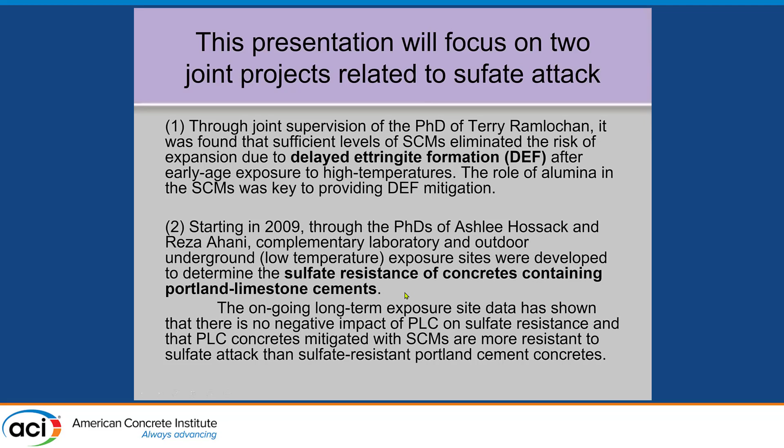And then in 2009, we had 2 separate PhDs, jointly funded by the Cement Association of Canada, to look at the sulfate resistance of these Portland limestone cements because it was a concern. The results have shown that there isn't a concern, and so they're now allowed. That's the quick and dirty study or summary.

So, delayed Ettringite formation. Some products, because this is going back quite a few years now, about 20 years, some cementitious materials or products, concretes, when heat cured typically above 70 Celsius, may undergo deleterious expansion if later exposed to sufficient moisture. And this has been referred to as DEF, due to an abundance of Ettringite found in the damaged concrete.

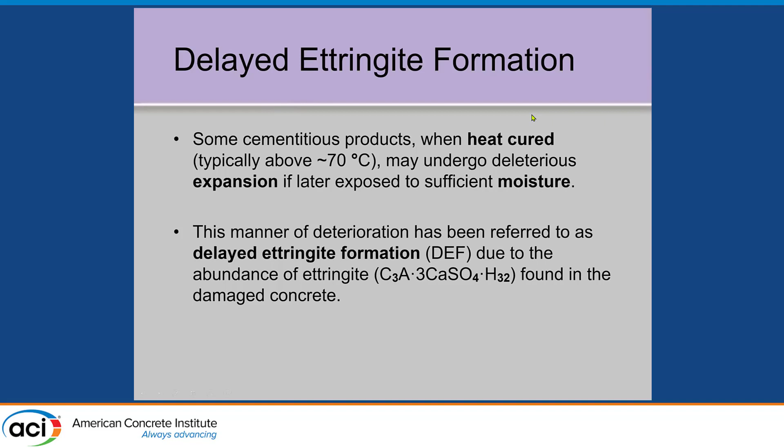And it started with railway ties. First mentioned in the 1970s in Germany, concrete railway ties that were heat-cured precast ties started to crack up and lose their pre-stress. And it was related to the elevated temperatures, maybe curing conditions, cement composition. And then there were other cases of DEF reported in various places, including US, Canada, Finland, South Africa, and Australia. And most of these associated with type 3 or higher strength cements.

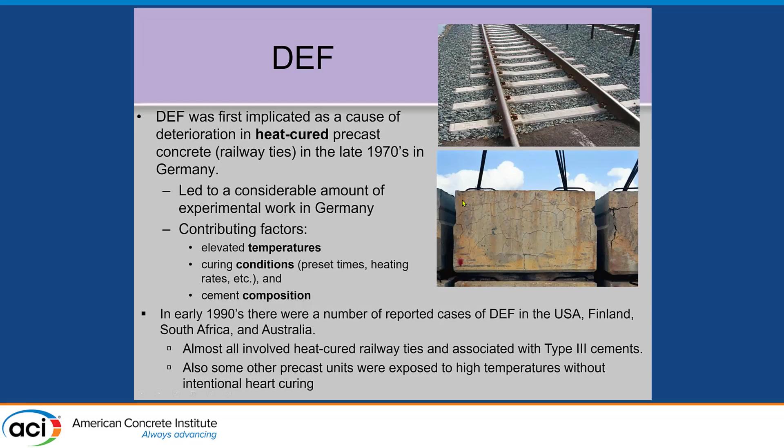And some other precast units that were exposed to high temperatures without intentional heat curing, not hard curing, such as this girder in Texas. There's a precast girder which cracked up before it even went into service. And people said it was ambient temperature DEF, but really it was cast in the hot sun, and I'm sure it got up to about 90 degrees Celsius inside the concrete during the curing. And so type 3 cements that perform quite well at room temperature, and these are expansion graphs versus age going out to about 3 or 4 years here.

At room temperature and up to 60 degrees C, you don't see any expansion. They just keep going without any expanding. The concrete's quite fine. But then when you get to 70 degrees C, in this case, the expansion starts to creep up over time. After about a year, it starts to creep up. And 0.5% expansion is a lot of expansion.

We typically talk about 0.04 expansion as the expansion you need to crack concrete. So these are mortar bars, so 0.1 for mortar bars. And then you see as the temperature goes up, that expansion occurs earlier and gets bigger.

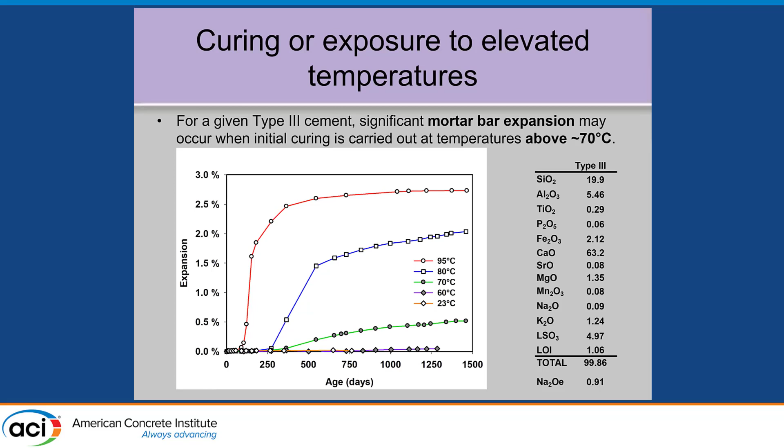So that was the problem: some of these heat curing regimes were going to very high temperatures, intentionally or unintentionally, to accelerate the curing to get the early strength. Typically for precast products, they're trying to get that early strength. So these were just heat cured for several hours at those temperatures and then placed in water, and they expanded over time.

And then we also did some work with concrete. So I didn't get a chance to update this graph, but you see the same story. When these concretes were exposed, type 3 cement concretes, two different ones here, at 80 to 95 degrees, we're getting deleterious expansion over time. But it's happening after about a year.

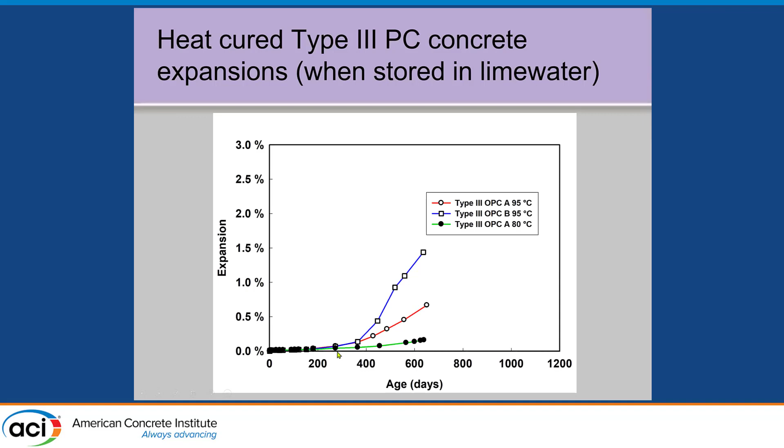But not all cements will expand when you cure them at these high temperatures, and not even all type 3 cements will expand at those temperatures. People were doing research on this at the time and looking at chemical parameters, but chemical composition cannot predict whether they're going to expand or not. Somebody came up with a formula, applied other data to it, and found it didn't fit anymore.

So here's some examples. There's a type 3 that expanded. There's a type 1 high alkali that's expanded. Meanwhile, a type 2 expanded, but not a type 5 or a type 1 low alkali cement. So there are certainly cements that are more susceptible than others.

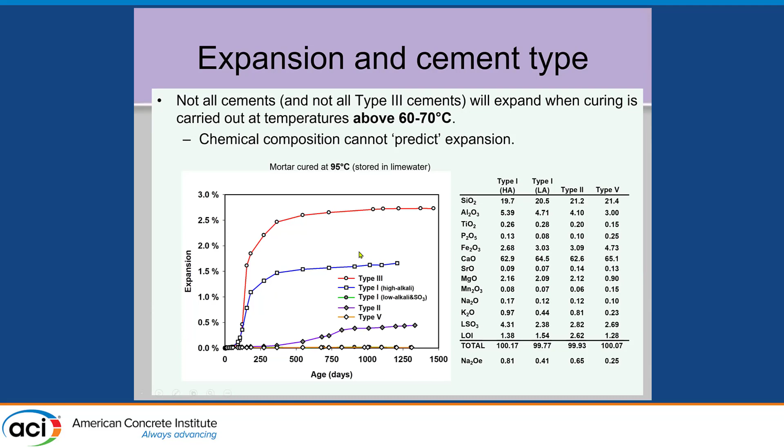Now, when you cure concrete at normal temperatures, this is a type 3 cement, the pore solution analysis over the first 24 hours on a log scale. Typically, you'd see the alkalis in solution, and hydroxyl in solution, and the sulfate in red here would typically form gypsum and ettringite, precipitate gypsum and ettringite, and then the concentration would come down, then the hydroxyl concentration would go up to keep a balance of cations and anions. So that's what normally goes on.

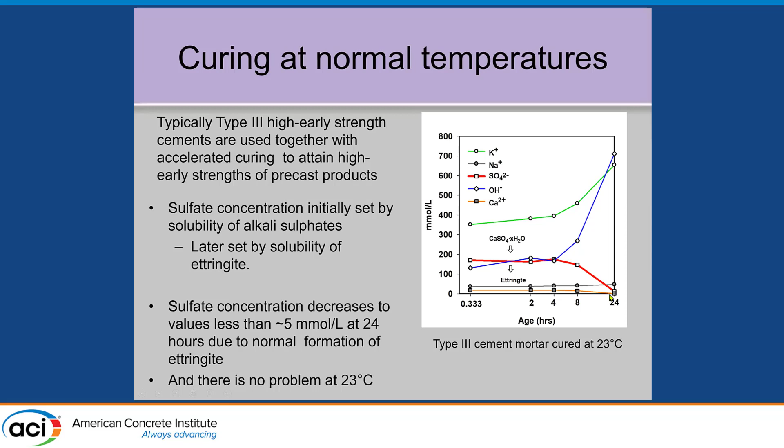Usually by 24 hours, there's no sulfate or no significant sulfate left in solution. At room temperature, that's what happens. So there's no problem there.

However, if you cure at high temperatures, such as 95 degrees C, the same cement, what happens is it looks the same up to about 4 hours when the heat curing was applied. And then what you see is that the sulfate doesn't disappear. It remains constant or slightly enlarged. And because the sulfate's up, the hydroxyl doesn't come up, because they have to balance the negative charges.

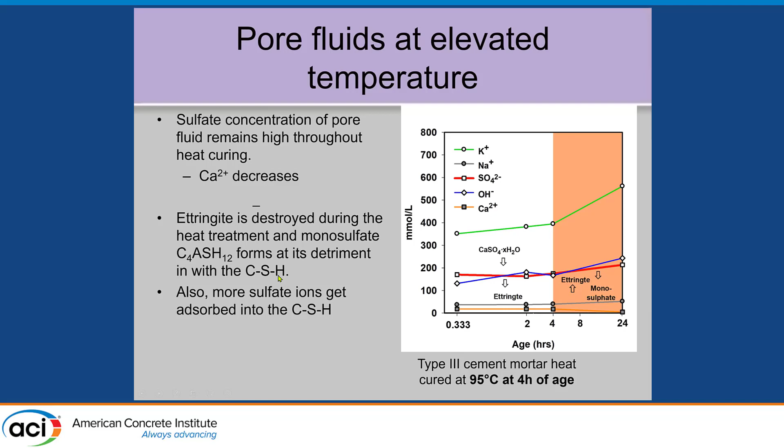So where is that sulfate going? Normally the ettringite is disappearing. Any existing ettringite gets destroyed at these temperatures, and some monosulfate forms and precipitates out. But a lot of the sulfate gets absorbed into the CSH itself, and that becomes part of the story.

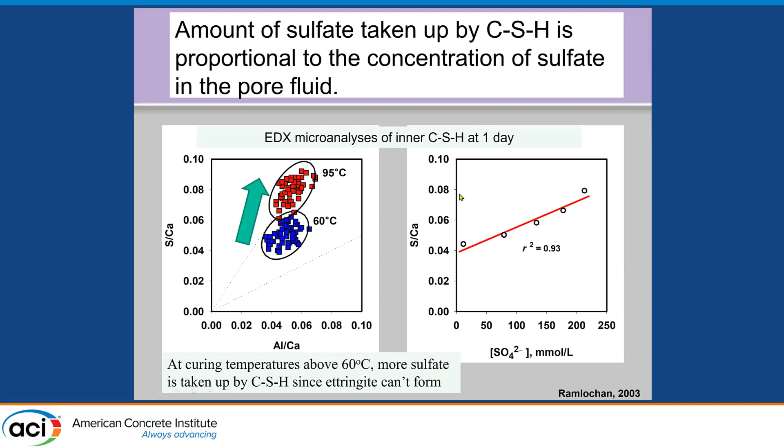And if you look at temperature effects, these ratios of a bunch of EDX points on CSH, what you see here is the sulfur to calcium ratio versus the alumina to calcium ratio. So there's more sulfur in the CSH when it's been cured at these high temperatures, whereas lower sulfur at 60 degrees, which is more representative of what you'd see at the lower temperatures. So there's a big shift in the sulfur that's contained in the CSH itself, and the pore solution increases as well with that higher sulfur in the CSH.

And then what happens afterwards is you put the concrete, or the mortar bar in this case, in water, and you get leaching. So the sulfate starts to come out. It starts at 1 day, you get these high sulfate ratios, and then at 64 days, 96, going down to several years here, the sulfur is coming out of the CSH. So that's what all these dots are, the sulfur levels within the CSH itself.

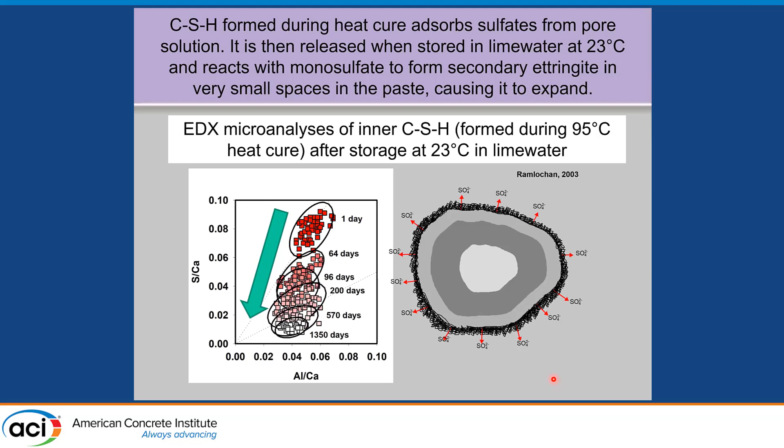So that's the CSH layer on the right-hand side. This would be the CSH layers, and that sulfur is going out of the CSH and coming out into the surrounding matrix. So this is just a schematic: the sulfate was in the CSH, it's then exsolving out through the system and getting removed over time. So the sulfates largely come out because of the alkali leaching.

If alkali leaching is prevented, sulfates tend to remain in the CSH and you don't get any expansion. This is work that Charlotte Famy did. She was working with Karen Scrivener at the time. They were doing her PhD about the same time as Terry did.

You see that in a high potassium hydroxide solution, there's no expansion. But when you reduce the high hydroxyl ion concentration in the pore solution, the expansion started to climb, and in pure water you got the most expansion because it's leaching out the sulfate from the CSH, and it's reacting to form this delayed ettringite.

This somewhat ties up to ASR because often DEF was associated with ASR damage, because ASR also binds up alkalis and takes it out of the pore solution, reducing the pH somewhat, such that you might get expansion.

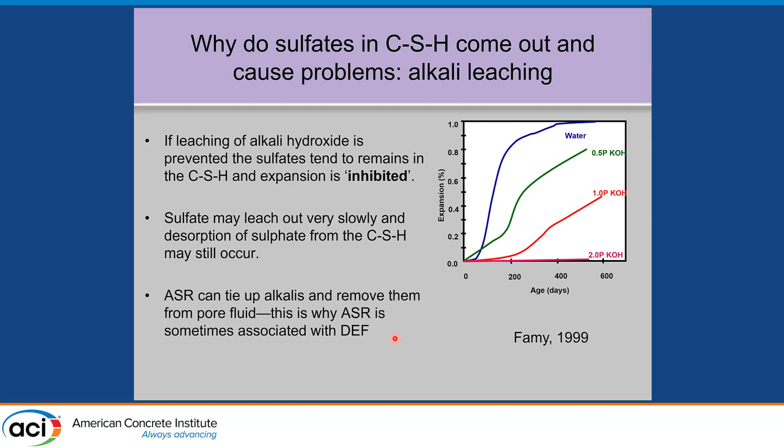And again, this just shows the leaching. At 1 day you've got the sulfate in red here, and the alkalis, say potassium, in green. At 1 day you put it in lime water after the heat curing, and then they start to leach out. So they come down, the pH drops, not to really low numbers, still above the corrosion threshold. So they're going from 13.4 to 12.7, which is quite a bit.

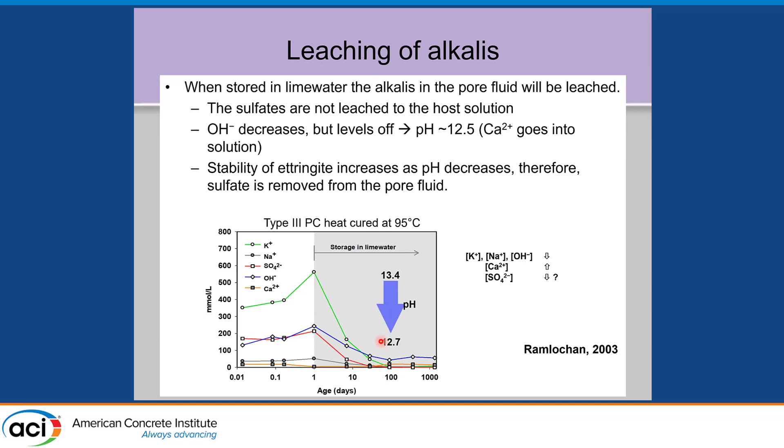What happens then is when that sulfate comes out of the CSH, you start to form this delayed ettringite in very small spaces within the matrix, the paste matrix. You see these little tiger stripe pattern things are ettringite that's formed in the paste.

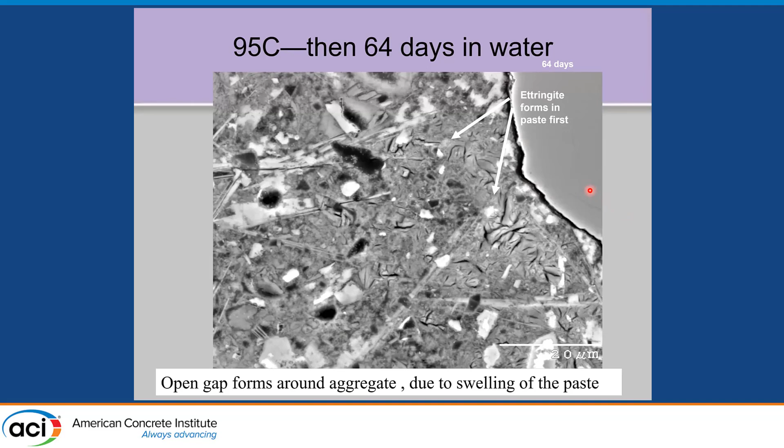The other thing you notice here is this is a sand grain in the upper right, and the gap there is empty. So when the expansion occurs, the paste is expanding away from the aggregate and creating gaps around the aggregate. And then over time, CSH doesn't like to be in, or any crystals don't like to be in small spaces.

So that ettringite redissolves and reforms into the interfacial transition zones. You see ettringite here in the lower left, marked by an E, where ettringite has formed in those gaps. In some places calcium hydroxide has also done the same thing and filled in those gaps.

So the gaps were not initially filled. The gaps were empty because of the swelling of the paste, and then the ettringite filled in those spaces due to Ostwald ripening, moving small crystals from confined spaces into open areas where there's less energy.

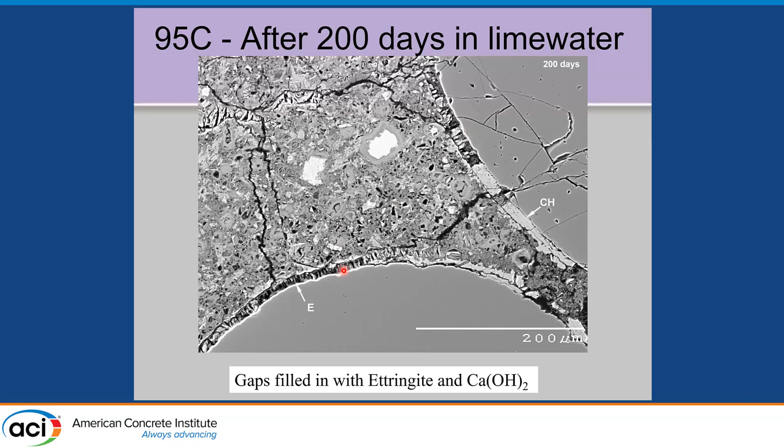And over time, with more time, you see every one of these sand grains—these are Ottawa sand mortar bars—you see the gaps surrounding each one of those aggregates due to the swelling, plus some cracking in the matrix.

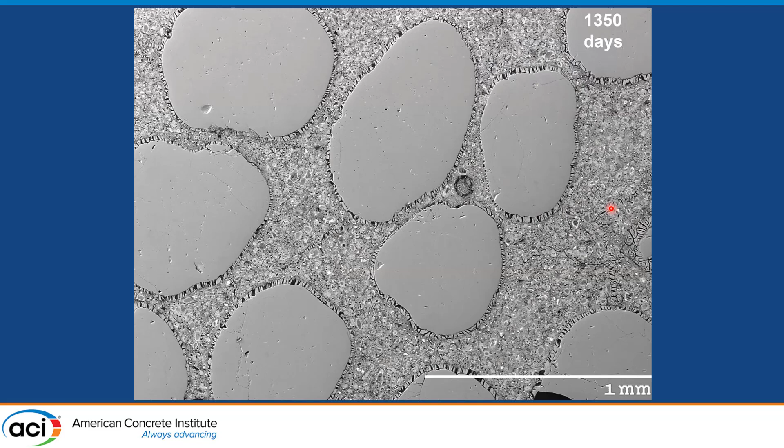So we can avoid DEF. The best way is to stay below certain temperatures, somewhere around 60 or 70 degrees. Stay below those temperatures and you typically don't get the problem existing, but that's not always practical. In mass concrete, you often have to control heat evolution. People try to control it to these lower temperatures, but sometimes they can't.

High external temperatures—some of the precasters in the Southwest US were casting at 50 degrees Celsius, in steel molds with outdoor exposure in the sun, so these concretes were getting baked. And that in part may have led to some problems.

And sometimes there are problems implementing temperature limits. I think people are much better now—this was 20 years ago. People are much better now with wireless sensors implementing temperature and thermal controls on concrete.

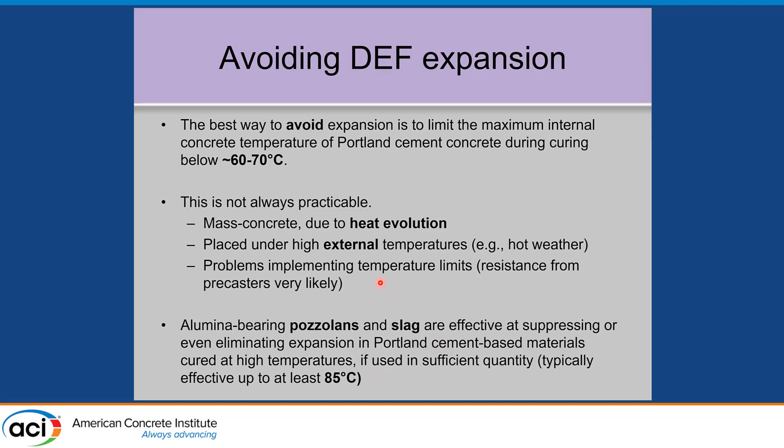But the other thing is that alumina-bearing pozzolans and slag are effective at suppressing or even eliminating this expansion at temperatures at least up to 85 and sometimes higher. This is resulting largely from the study I'm talking about that we did with Terry Ramlochan.

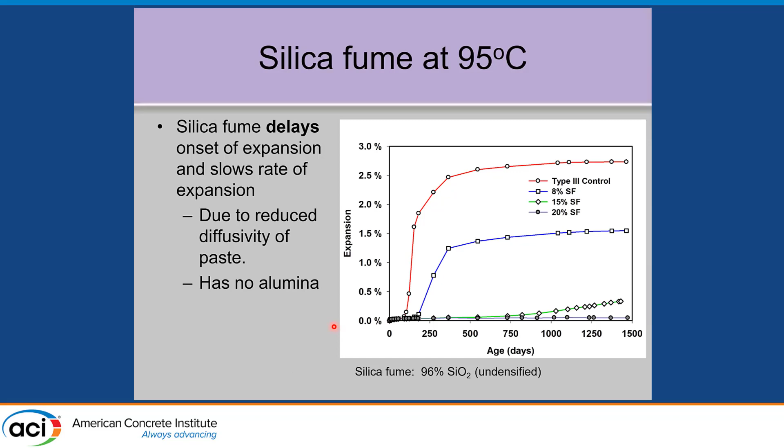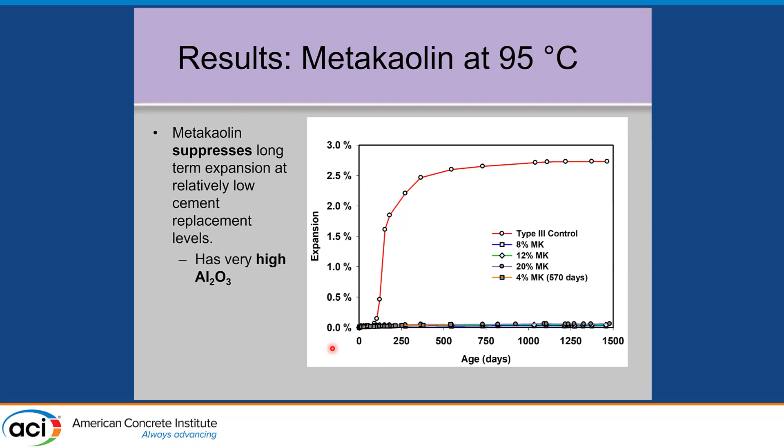However, metakaolin, which is an aluminous material, with that same cement you can see even at 8%, 12%, even 4% controlled the DEF. So the alumina seems to play a role in this.

And you see the same thing with blast furnace slag, which has alumina, not as much as metakaolin. Even 10% slag helped, but not sufficiently. A really high alkali cement, type 3, with 25% slag wasn't enough either. But you can see that generally 25 to 35% slag was sufficient to control the DEF.

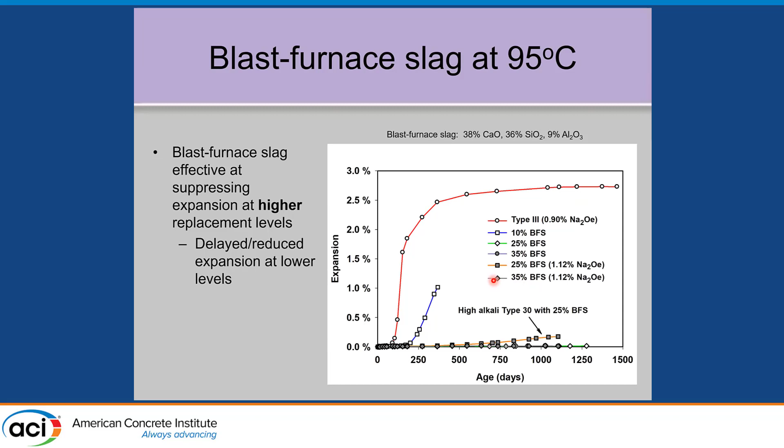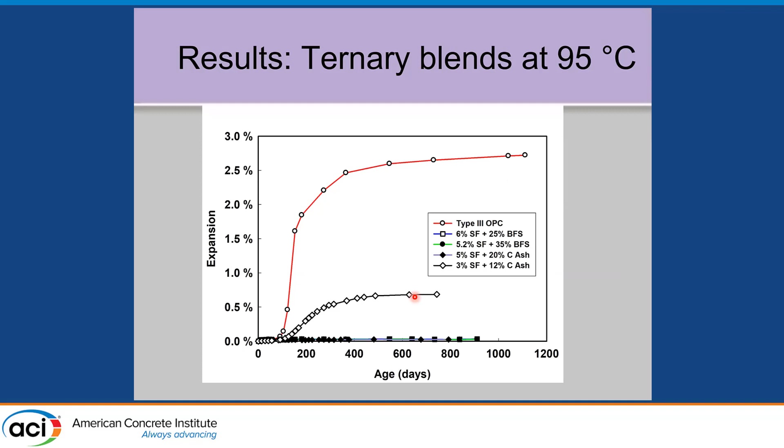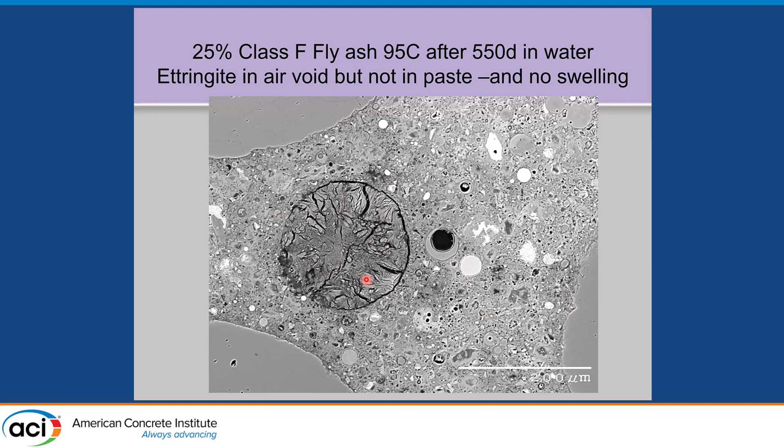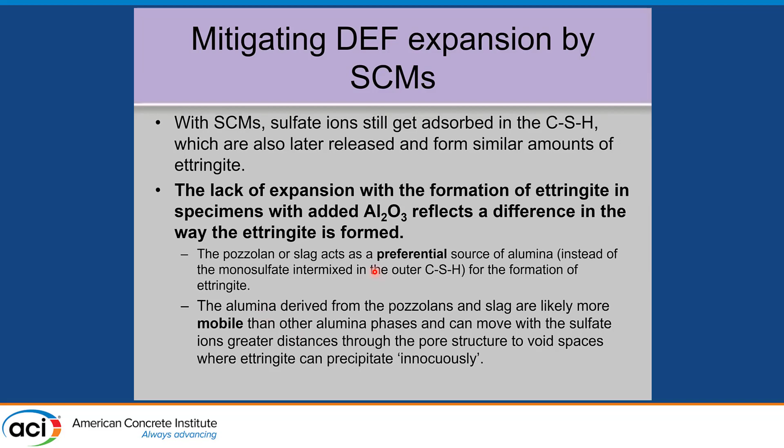So what's going on? Why are they mitigating? With SCMs, sulfate ions still get adsorbed into the CSH, and they're also later released to form similar amounts of Ettringite. When we measured the amount of Ettringite in the mix with SCMs, it was pretty similar to what you'd get with the ones that expanded. But it comes down to where the Ettringite forms, whether there's expansion or not. The pozzolan or slag acts as a preferential source of alumina to react with the sulfate and form Ettringite, instead of the monosulfate intermixed in the CSH. So instead of monosulfate turning into Ettringite, which can be expansive, the Ettringite forms elsewhere where the pozzolans are, moving the alumina and sulfate to open spaces where they formed. So the Ettringite is still forming, but in places where there is no expansion.

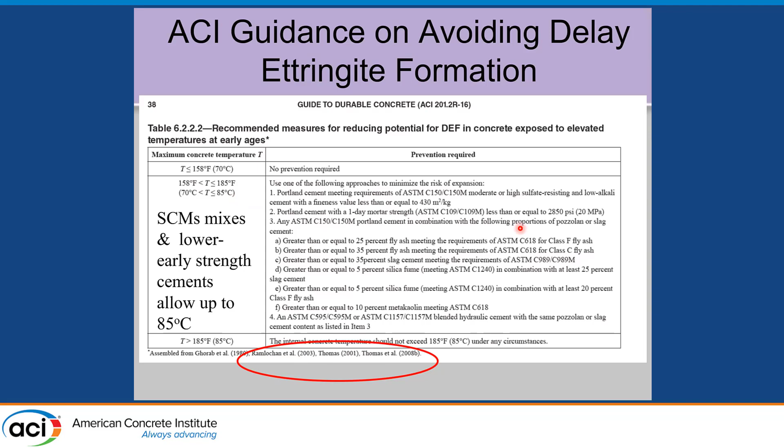So this all led to the ACI guidance, out of the 201 guide. There's also, I think, guidance in the 308 Curing guide. You can see I circled the names here - Ramlochan's work, plus some of the work we did jointly, and some other work Mike did - all referenced in this table. It basically says if you stay below 70 degrees, you don't need to do anything. Between 70 and 85 degrees, if you use alumina-bearing SCMs or ternary blends, you can use them, or low-heat cements - we also did work on that. Above 85 degrees, even though some of these systems worked at as high as 95, we're saying you shouldn't exceed it under any circumstances. So all this work, plus work of others, led to this table that currently exists on avoiding DEF problems in concrete. So it had some impact, this project.

Now, to switch to Portland-Limestone cements - we were originally approached in the Canadian standards committee to discuss putting Portland-Limestone cements into the standard. The people who objected the most were Mike and I, along with Bob Day at the University of Calgary. So the industry decided to grease the squeaky wheels - they funded Mike and me, and we got Michelle Nokken at Concordia to help write a literature review on Portland limestone cement, a state-of-the-art report, for the CSA committee. It's published as a PCA report and still available. In 2007, we presented that to the CSA committee, and as a result we gave qualified acceptance in CSA in 2008 to Portland limestone cement. The only place we thought there wasn't enough information was on sulfate resistance. I'll come to that.

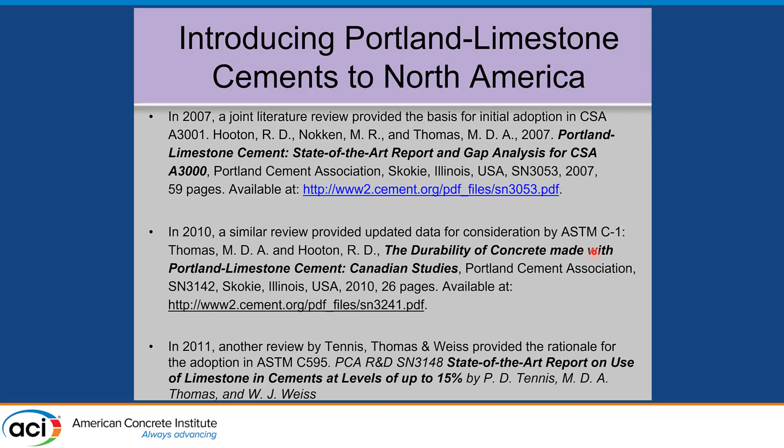We did a similar review in 2010 for the US for ASTM, funded by the PCA. Then Mike, along with Jason Weiss and Paul Tennis, did another report in 2011 to support that - I reviewed that report as well. So that was all to provide the background or rationale for including Portland limestone cements. They'd been used in Europe for decades, but hadn't been used here, and of course people wanted to know how this was going to affect concrete.

So the main concern was there's not enough information about sulfate attack, and there was a potential concern about thaumasite sulfate attack, which involves carbonates as well as sulfates at low temperatures and attacks the matrix. There'd been a case in the UK at the time - Norah Crammond had a conference about thaumasite sulfate attack. So people were concerned about this whole issue. We did a bunch of lab work, and then the Cement Association of Canada funded both Mike and me to develop concrete outdoor exposure sites, because people weren't happy with just mortar bar testing to demonstrate whether there was going to be a problem. So we started this in 2010. We both cast concrete mixtures, quite a few mixtures.

A few years ago, we achieved both ASTM and CSA standards acceptance for sulfate exposure of PLC mixes, provided that you did the normal C1012 mortar expansion tests. So the concrete backed it up.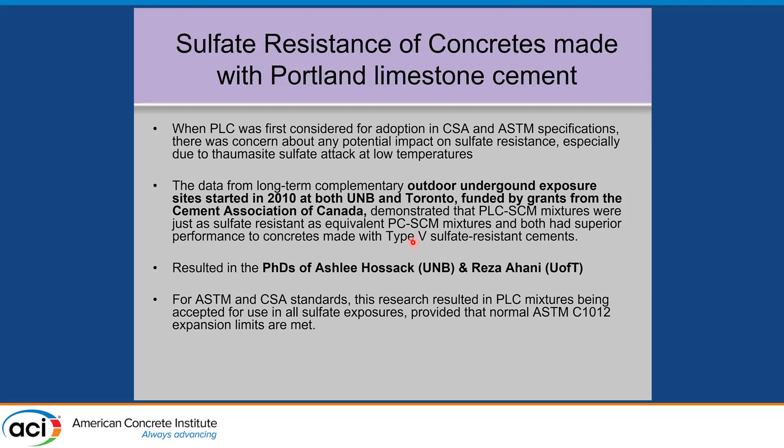I'll just show you 3 slides here. We used a visual rating system. Mike had a different numerical rating system for his concrete that Ashlee did. We sort of used the stoplight approach: green is good, red is bad, and other colors are in between. We just looked at these concretes on an annual basis.

They were in either mag sulfate or sodium sulfate, 15,000 ppm, underground in temperatures that range from 3 degrees C to 15 degrees C year round because they were stored underground, and we monitored their condition.

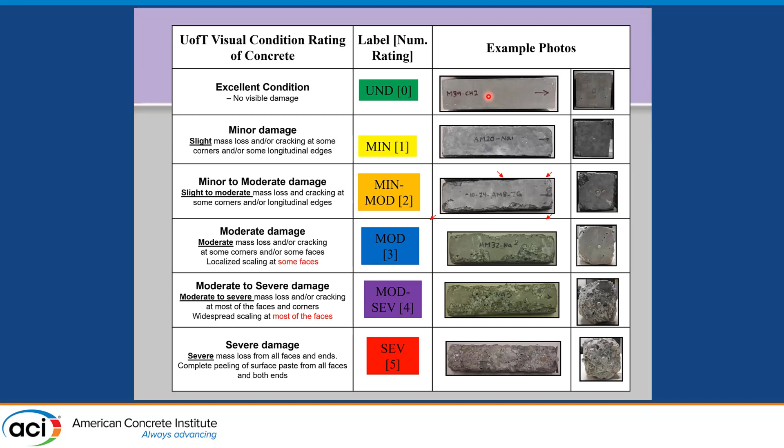So I'll just show you a few slides. This is after 54 months, or 4.5 years, in sodium sulfate, 0.4 water cement ratio concretes. GU here is the Canadian type 1 cement with 40% slag.

Here's an equivalent cement, but with 15% limestone in it and 40% slag. There's no difference whether the limestone's there or not. And when we bump this slag replacement to 50%, there's still absolutely zero damage.

It's in excellent condition. But the interesting thing is our benchmark here with these studies is compared to what people were doing now—people accept type 5 cements, or HS in Canada, cement concrete for sulfate resistance. And you can see the difference at the same time.

The type 5 cement that is normally used—and this is a cement available in Western Canada and Northern US—was severely damaged at 0.4. This is another product, a blended sulfate resistant cement with 30% class F fly ash in it, and it performed about the same. So those two on the right were already allowed in the standard.

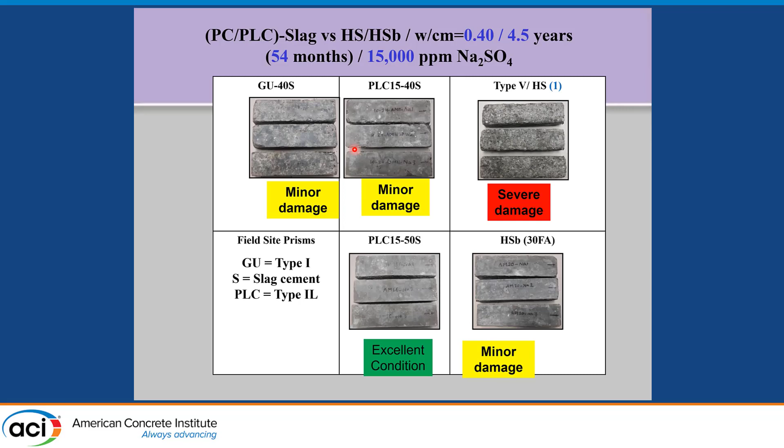The PLC ones were not allowed at the time. And if we go over, here's another limestone cement at 10.5% limestone in it. Again, this is only 33 months old, but it's performing as well as 2 other type 5 cements that are being used commercially.

And when we bump the slag replacement of the Portland limestone cement to 50%, there's absolutely no damage again.

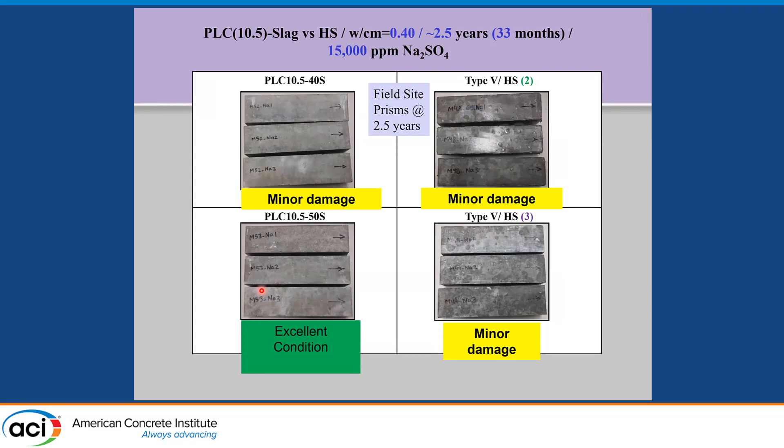Anyway, there's a lot of data in this report, which you can download. I've got the web address there from the PCA. We wrote this in 2016. We've both collected data since—I know I did data in '17 and '18, collecting further data which is not in that report. And Mike, I think, repeated his work again this year to get more up-to-date data.

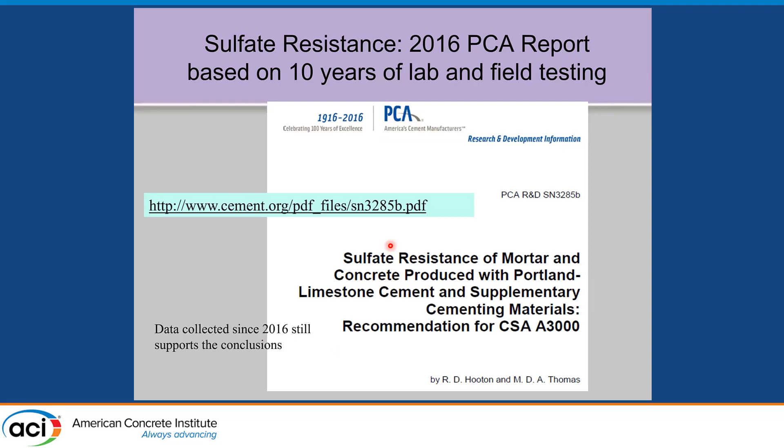I'm hoping, because of COVID, I haven't been able to dig up the site for the last 2 years because they won't let our students go to the site during COVID. So hopefully next spring I'll get 12-year data on this study. I've got over 1,000 beams buried underground here in my study.

So the conclusion from that joint study is the addition of SCMs greatly improves resistance to sulfate attack. Nothing new there. Most of the SCM blends with GU and GUL cements are outperforming sulfate-resistant cement concretes that have been allowed for years. And there was no consistent trend of the impact of limestone content on the performance of those mixtures at the same SCM levels.

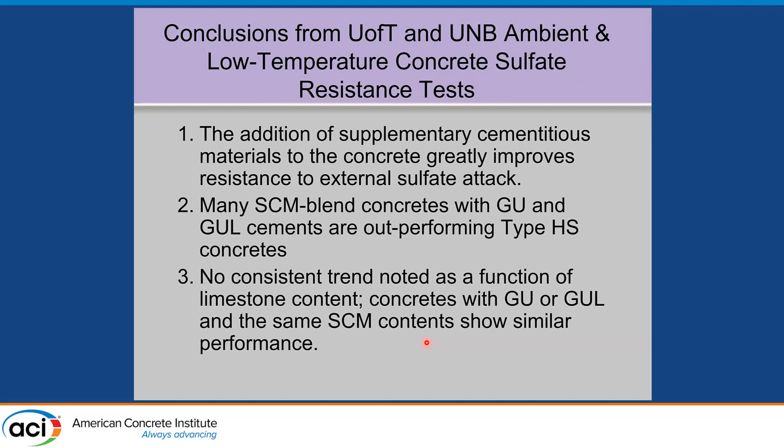So as a result, ASTM C595 and AASHTO M240 allowed type 1L with up to 15% limestone in 2012. And based on this research, the standards now permit these cements, in proper combination with SCMs, to be used in sulfate exposures, just using the normal ASTM C1012 test limits.

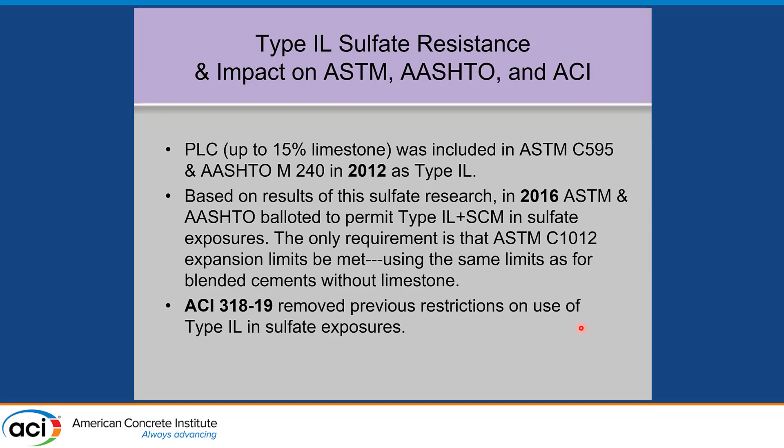Also, ACI, the building code, in 2019 removed any previous restrictions on the use of type 1L in sulfate exposures. So this work had an impact on that.

And I'll just finish up, because finally, Michael has collaborated with many excellent researchers. We've heard from several of them today in these sessions. He's made a lot of outstanding contributions to ACI and other standards agencies, ASTM, CSA.

He's nurtured the development of numerous brilliant students who've now become influential researchers. We've heard even from a couple of those today who were influenced by Mike's work as students. He has influenced concrete knowledge and concrete standards globally. So the impact of the ASR work, for example, is pretty much global now.

It's been great working with Michael. We're still collaborating on several projects at the moment, and it's great to have him as a longtime friend.